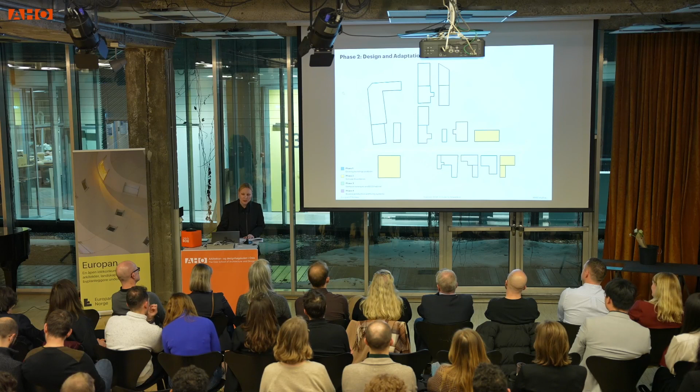The second phase is when design begins, called design and adaptation, when the circular foundation is established and new buildings start to appear along Grensen street. That's how the first line of houses comes into place, connected to the circular development, where materials taken from existing buildings are analyzed and built into the new structures.

The third phase, called construction and upcycling, is about the campus synergies and habitat. This activates the areas, bringing the residency functions that will inhabit this area and make it populated around the clock, but also the areas on the ground floor used for common facilities, for example a canteen placed in the middle of the site, and in a corner there's a building with an R&D lab and a 3D printer.

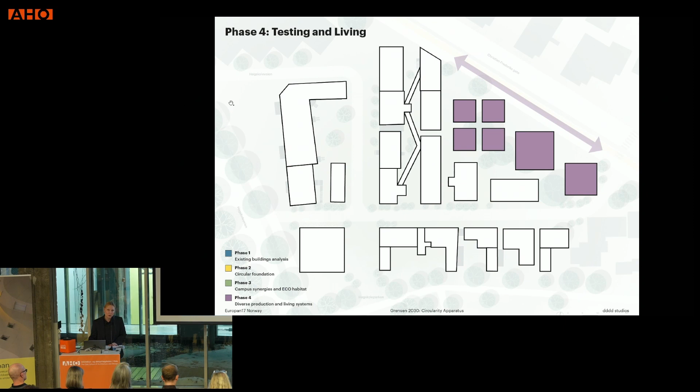The last phase is testing and living, meaning the new clusters of development actually activate the main street with a bike path. That's where the diverse production living systems are - those are the buildings I'll show visuals of later and talk about their programs. So that's how phases 1, 2, 3, and 4 come together, and you see they are all interconnected, working together to develop a complete strategy.

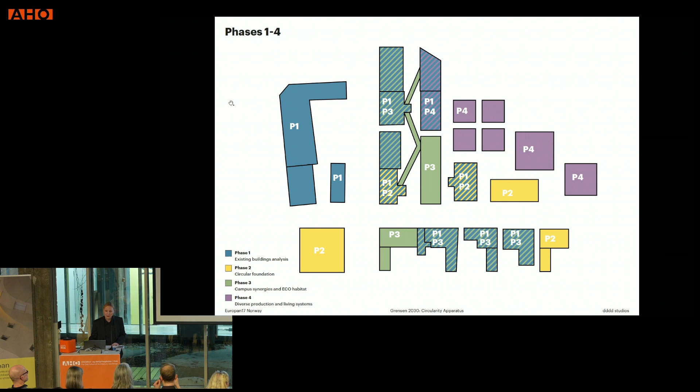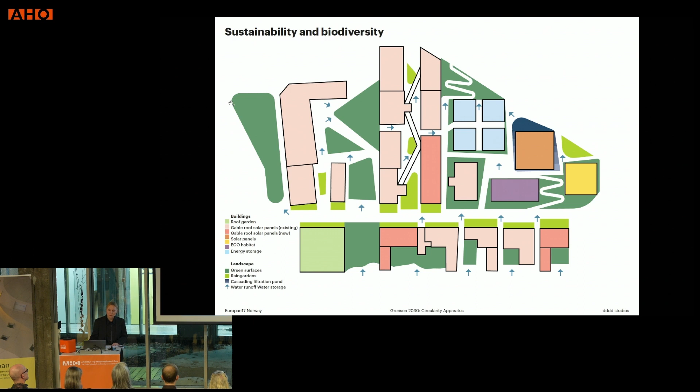Sustainability and biodiversity is very crucial for this site because first of all, it has a particular historical value for the whole area, but it also needs to be modernized to accommodate the current needs of the development and of any new campus. That's why the area has integrated tools and technical systems to provide electricity and water storage within that area, and why it integrates principles of circularity.

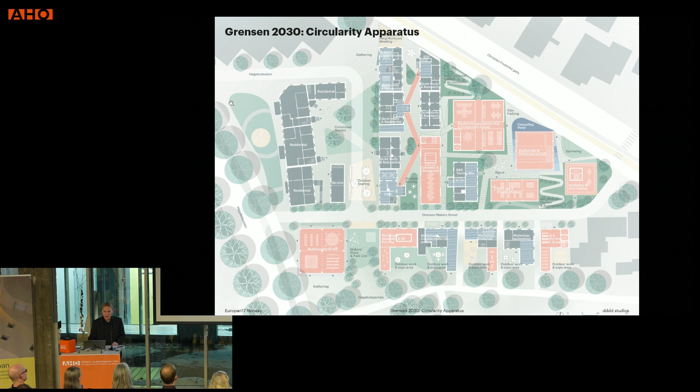This is a plan showing how the development may look after 4 phases - the pink buildings are the new ones, the gray ones are existing buildings, and the dashed buildings are adapted and modernized. This shows how it may look, because if we're working with circularity and different stakeholders, the final result of the building is dependent on the process. So the stakeholders who will be inhabiting the buildings may also influence what the final buildings look like.

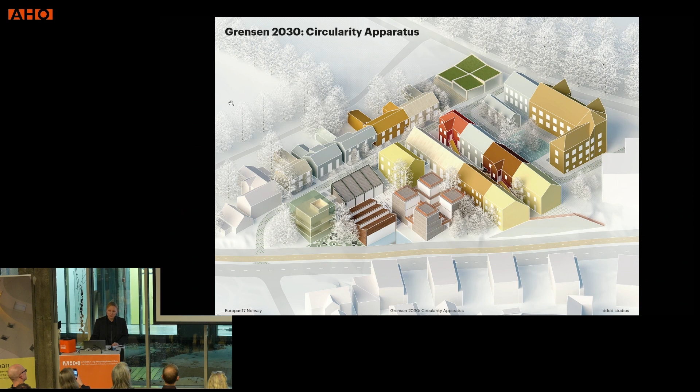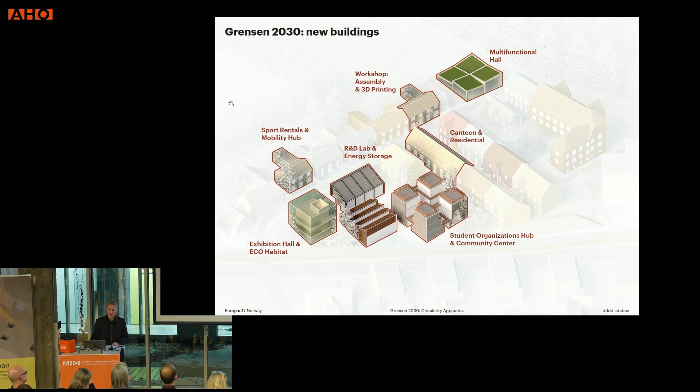So we have the multifunctional hall, workshop assembly and 3D printing buildings, sport rentals and mobility hub, exhibition hall and eco-habitat, R&D lab and energy storage, student organization hub and community center, but also a canteen and residential building - a multiple range of programs that I'm not going to go into.

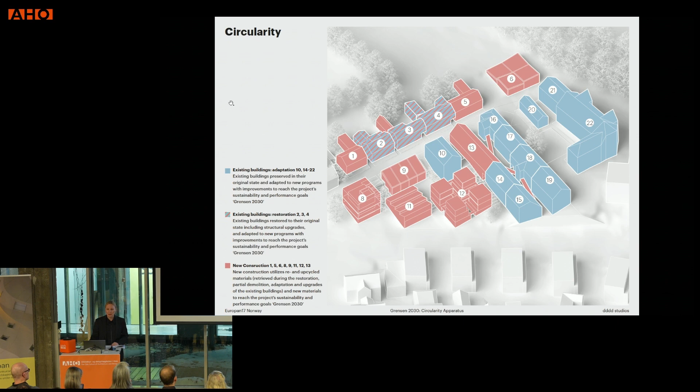And the new construction buildings are the ones that will support the energy, the water collection, and provide most of the facilities for study, for exhibition, but also for exchange and other programs.

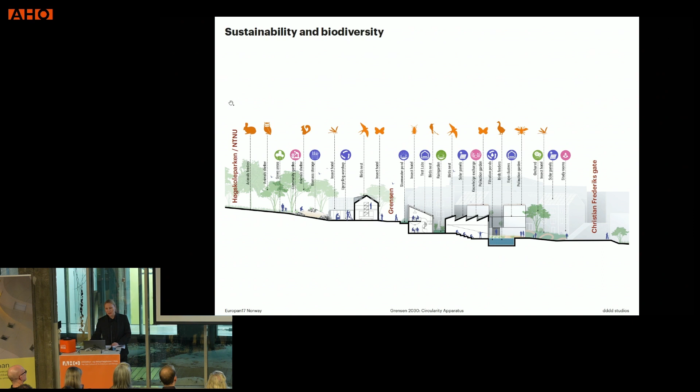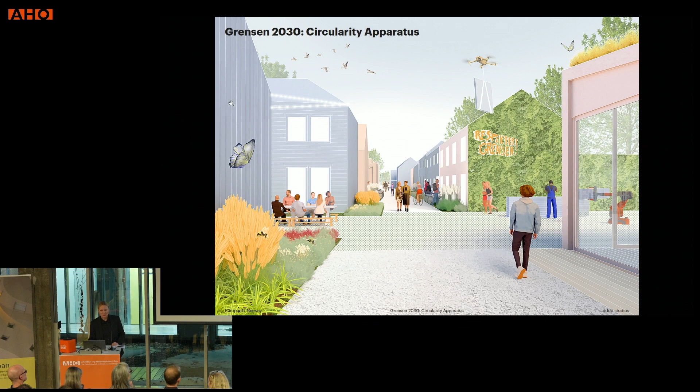Sustainability and biodiversity - how it actually integrates within the different surfaces. And that's how Grensen street looks right now, and that's how it may look in the future by 2030. Thank you.